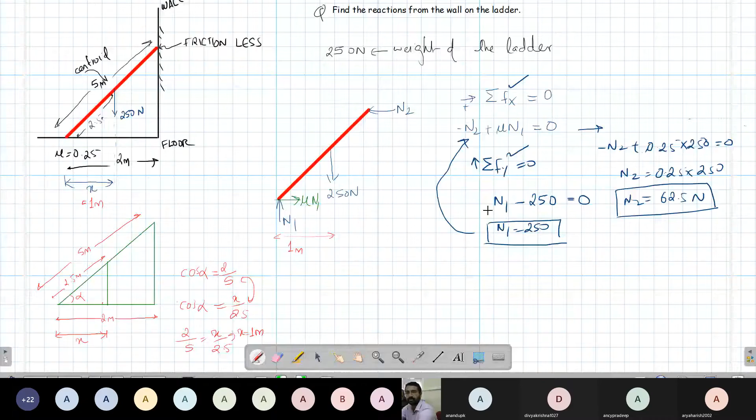So last class we were looking into ladder friction. Basically all the ladders that we use work because there is friction. Friction alone allows the ladder to work. If there is no friction, what happens? If the ladder is just kept like this, because of its weight, it will just fall down. It is friction that is keeping the ladder in place.

So we have seen some problems. I think we have given assignments also, and seen some of the assignments. Some people are yet to finish the assignment. I don't know why.

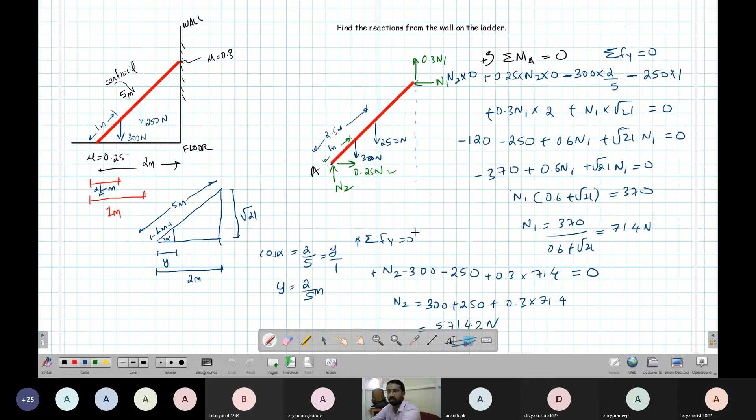Okay, right. So this is the ladder friction problems that we were doing. Today we will start a new module. So basically friction, there is a lot of problems that we have to see.

So what I'll do is, for the last 5-8 years of KTU problems, I'll make small videos of each one and upload them in Moodle. After uploading, I will put it in Teams also so that you can go into that and look. Otherwise I'll upload it on YouTube. Either you can go look on YouTube, or I'll put it in Moodle and you can look there. So regularly make sure that whatever problem I give, you know how to solve it. Or you can change the values yourself and solve it. And on weekends I will start giving more assignments from now on.

Because in class, you have to make sure how many problems you count, how many problems you are doing. The more problems you do, the higher the chance you have of getting marks.

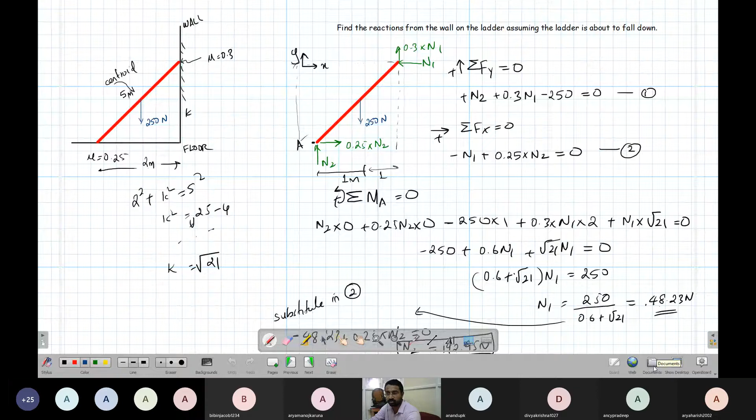As we move forward, we are going to use all these concepts. Okay, right. So now today's class, what we will study is a new concept called moment of area. I don't know whether you have studied this in your 10th or 12th.

When I was studying, it was there in 12th - moment of area and centroid. I'm sure it was there for you people also.

So what is moment of area? Moment of area is defined as - let's say we have an arbitrary area here. Arbitrary area, some area is there. And we also have two axes.

Moment of force is - so basically we have a force. Let's say we have a moment about this point. The magnitude of force is this, and the distance is, let's say, d. So moment of force is equal to force times perpendicular distance.

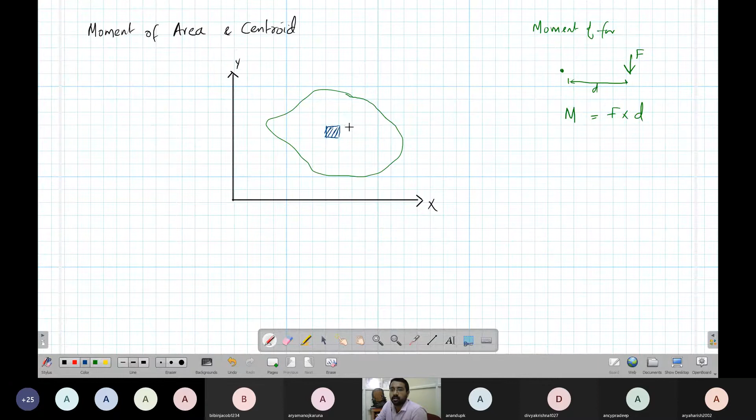Same for moment of area. So let's say I will take a small arbitrary area here. I'll take this area, each area, I'll call this area dA. If moment of area - I can again find this moment with respect to any axis also.

Force - so let's say more generally, some force is there, and some moment is there. Two axes are there. We can find moment in this plane or moment about this plane.

That means you split this force into two. This is the y component, this is the x component. You can also find moment about this line, like a point here. About this axis, we can find moment about this axis also.

Let's say about this axis, the component into perpendicular distance. This component into this distance will give moment about this axis. The force in that axis, that component into this perpendicular distance, multiply. Similarly, this also you can have moments. We can define moments in any axis.

So let's say we define moment about the y-axis. So I'll write, because of the small area, I'll call this dM about y-axis equal to the area into perpendicular distance. So this perpendicular distance, I'll just give some arbitrary distance. Let's say I'll call this distance x, small x. I'll call this distance y.

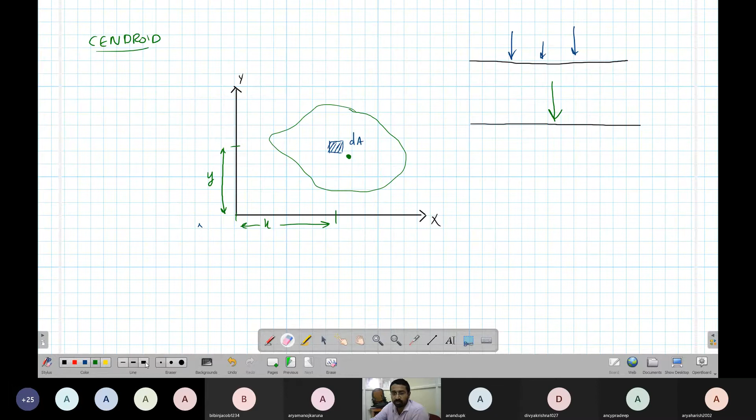So similarly, we can assume this entire body, we can represent this entire body in a single point. I don't know what is that point, let me say this is a point. The entire body area I can represent in a single point, such that the moment of area of this entire body will be same. So let's draw an equivalency, at more ease. So this I'll remove.

Okay, so moment about x of this and moment about x of this. Let's say the area of the body is A. I'll assume this entire A is concentrated at this point. Area full, I am assuming it to be concentrated at some point. So this point is, let's say, Xc and Yc. Xc is for centroid X coordinate, Yc is for centroid Y coordinate.

So moment of this area about x is integral of y dA. Moment about y equal to integral of x dA. So this is same as A times Xc, A times Yc.

So let's say this point area, same area, but it is located at one point. About x axis the moment is area into distance, distance is Yc. About y axis, area into distance, that is Xc. So this both are same, same or equal.

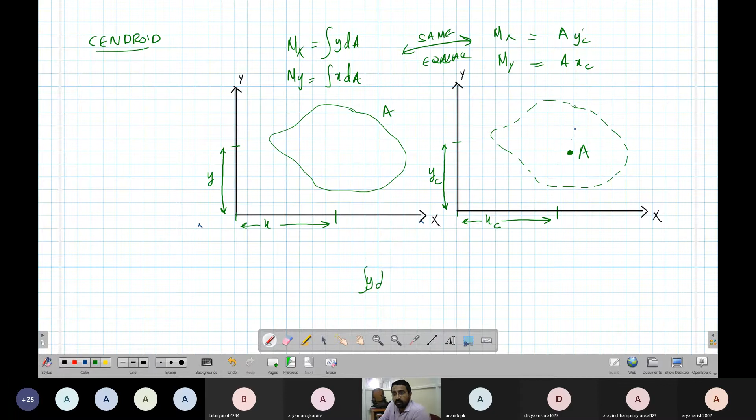If I equate these two, I'll get integral of y dA equal to A into Yc, Mx. So that means Yc equal to integral of y dA divided by A. Similarly my Xc is equal to integral of x dA upon A.

This is the formula for centroid. I told you it's random, so this equation and this equation I equate. From A Yc equal to integral y dA, that means centroid location Yc equal to integral of y dA upon A, and Xc equal to integral of x dA upon A. I hope this is a simple concept.

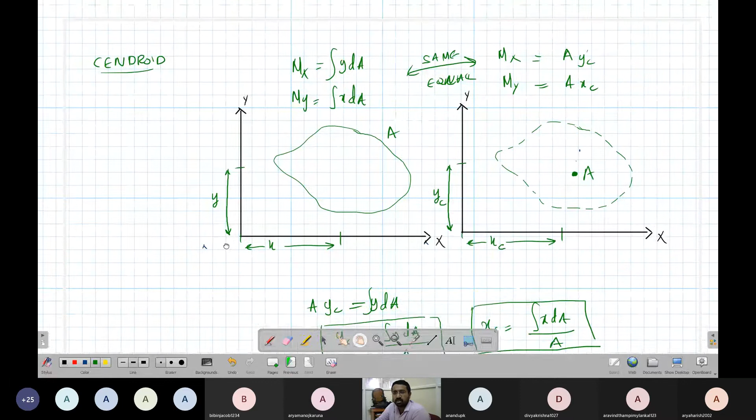So now our next aim is to find centroids of regular shapes and composite shapes. We will do one regular shape, and then we will also do a composite shape.

So let's say rectangle, we'll take a rectangle, the easiest one. This is a rectangle, let's say this is the width, this is the depth. Okay, and I will also construct an axis. I will put an axis here, if not an axis it should be easy.

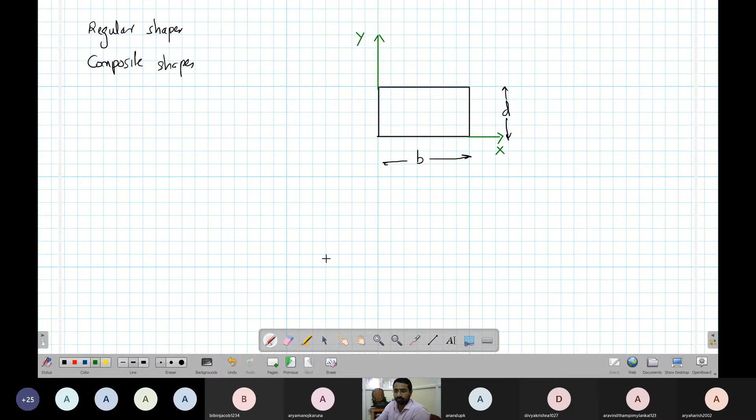Right, so this is my x-axis, this is my y-axis. Now, what is moment of area? Moment about y equal to integral of x dA.

So what I will do is take a small strip here, a very small strip. This strip has the area dA. Why didn't I choose a small square? Because this strip's area I can find very easily. It's an easy item, a symmetric shape, so I can take a strip here. Let's say I'll take this, so this is x.

This very small distance in the x direction is dx. So my dA will be equal to dx as the width, each rectangle area is width into height. Height is d. So d into dx is my small area.

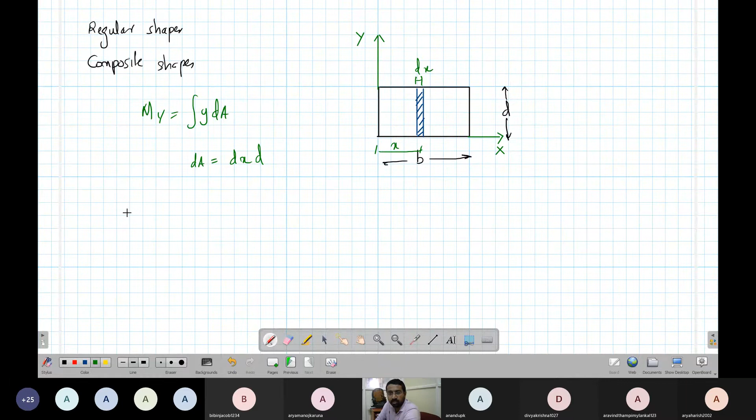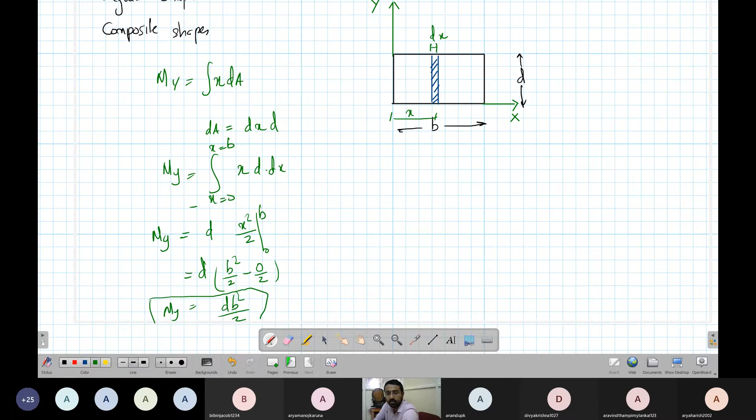Right, so this is same as, so d I can take common. Integral of x dx is x square by 2, limit is from 0 to b. So this is my moment about y-axis. This is equal to, substituting the limit, d into b square by 2 minus 0 by 2. So this is db square by 2, the moment of this rectangular area about the y-axis.

Now I told you we can assume this entire area to be concentrated at some point. So what is the area of the rectangle? Area of the rectangle is b times d. So I can assume this entire area to be at some point, and remove all these details, remove all these things.

So this entire area, in the rectangle, is BD. BD is the area, located at some distance. This distance I can write as xc, the centroid distance, and this is yc.

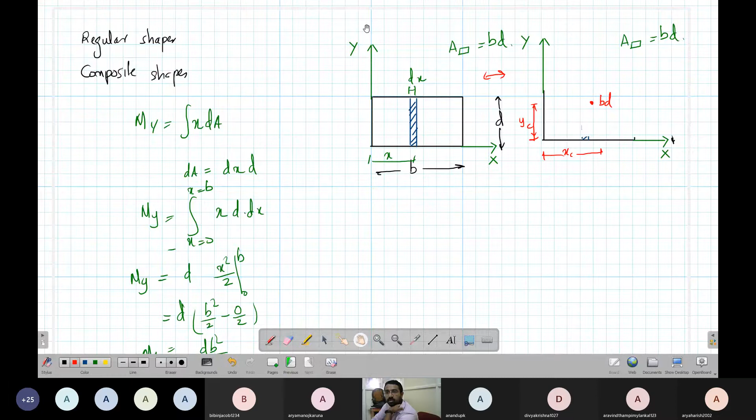Both will have the same moment of area about this axis. We have already found the moment of area of this diagram about this axis, the y-axis, and that value is db square by 2. Now, what is the area moment of this area about the same axis? We can write m about y-axis equal to area into perpendicular distance, so b into d is the area, perpendicular distance is xc.

So I can equate these two. Equating gives me xc into b into d equal to db square by 2. So xc equal to, cancelling b and d, xc is equal to b by 2. I think you people already know this: the centroid is located at b by 2 distance. So this is b by 2.

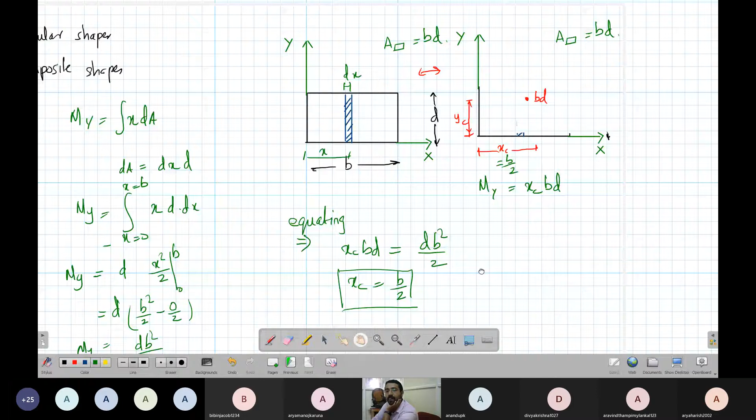So how do you find the other axis, the x-axis moment? That is also the same, the only thing is you have to take a different strip, a different horizontal strip. For example, this way.

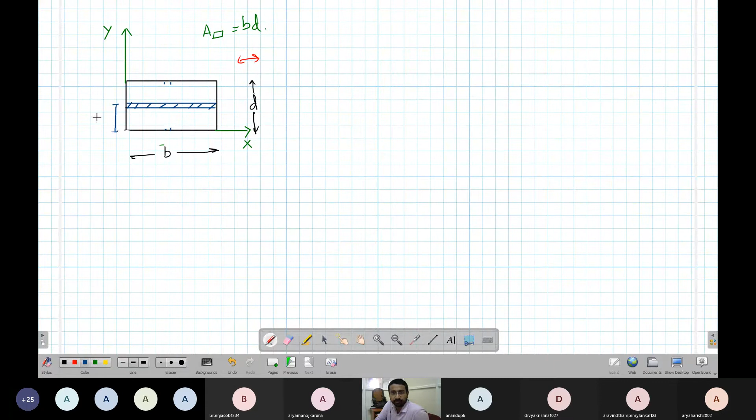Okay, so now we have to find moment about x-axis. I will take a consider strip in this direction. Let the strip be located at distance y, and the thickness of the strip be dy. So small change in y, dy. So my area will be dy times b.

So moment about x-axis will be the integral of y dA. That is, the location is y, and dA is b dy. What is the limit? Limit is y equal to 0 to y equal to d.

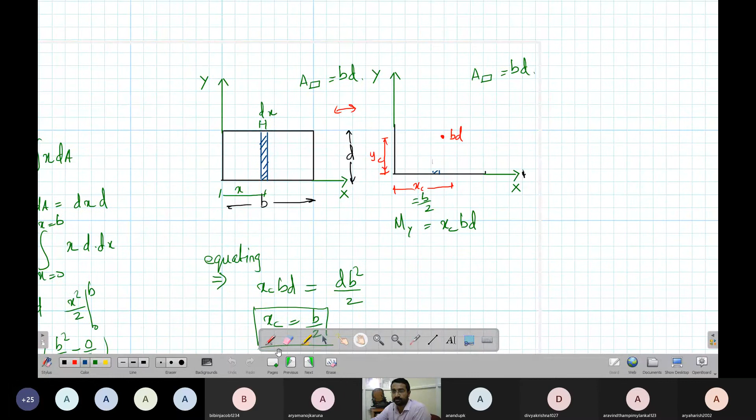So we can write this as area is b times d. The perpendicular distance is yc. You wouldn't integrate it because it is a point. Area with a point, and value of area is b into d.

So we have to equate these two, and you will get b times d times yc equal to bd square by 2. So if you cut, we will get yc equal to d by 2.

Okay, so this will be equal to d by 2. That is the rectangle centroid, b by 2 and d by 2. Width in the half, depth in the half, on a centroid point area. Okay, so this is about centroid of very simple diagrams.

Now we have to find centroid of complex diagrams. Complex diagrams, so let's say you can get many types of problems. So let's say you have a diagram like this.

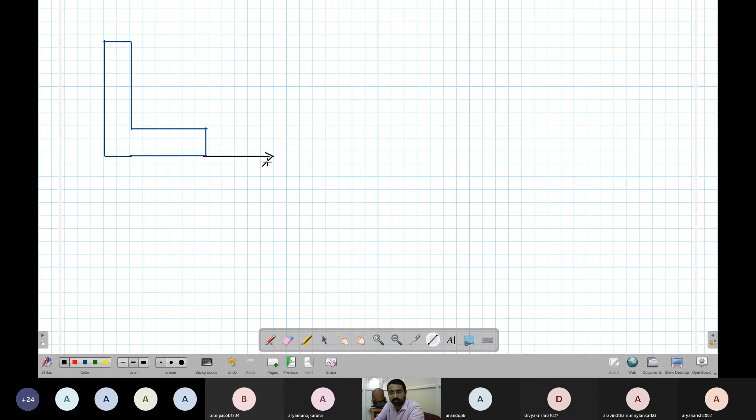Okay, so let's say I'll draw an axis. Axis, that is very important. I'll draw an axis here. So let's say this is my first axis, this is my second axis, because we are always finding centroids with respect to a reference axis. So this is x, this is y. The x-axis and the y-axis.

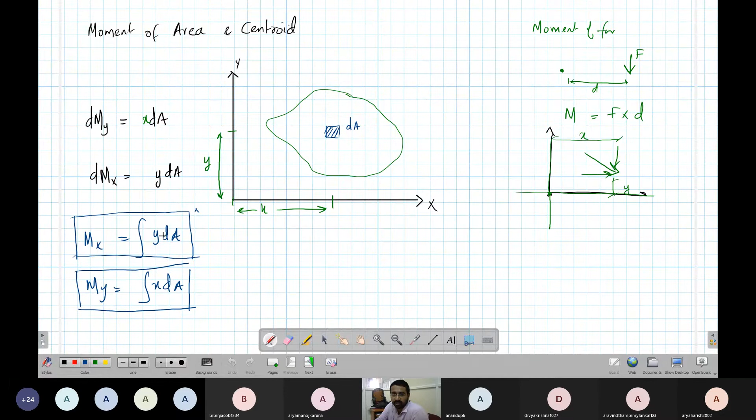Okay, this we can do in many ways. So one way is we will identify one area, so this is one area in which I can know the centroid. There is another area, that is this. These are two rectangles. So I can name this as my first area, and this is my second area.

Okay, so we have to find the centroid in both directions, x direction, y direction centroid. Regularly divide areas, convert it. So we have a rectangle here, we have a rectangle, right? So let's say we will put some sizes, numbers, then it will be easy for us to calculate. So let's say this is 100 mm, or this is 200.

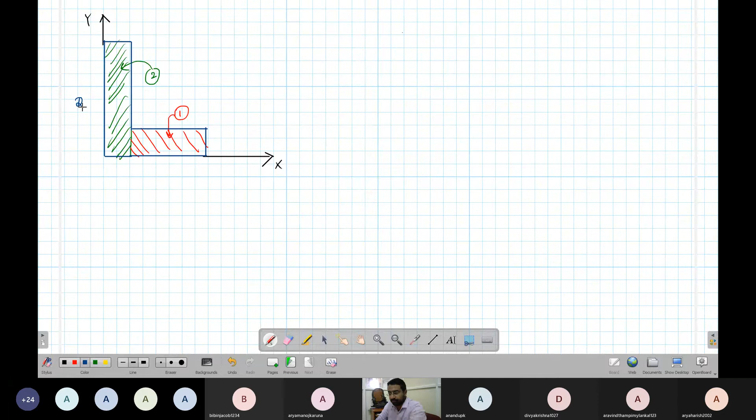This is 200, let's say this is 20. Let's say this is 100, let's say this is also 20.

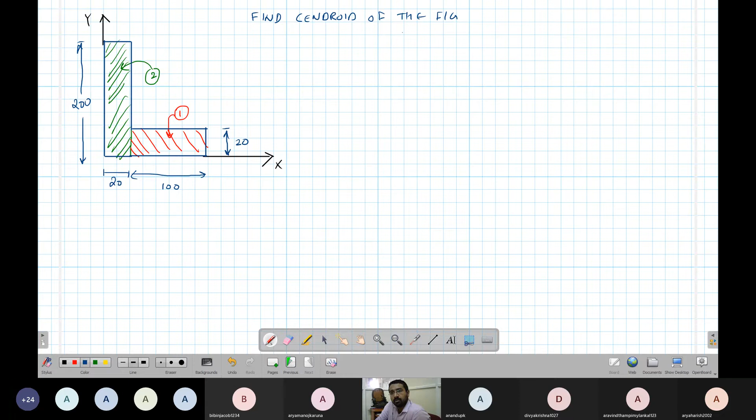So usually we need to find the centroid of this figure. I told you we have to split into small areas, so this simple table form makes it more easy. So what all we have to do in the table form - let's say we'll find A.

AI, AI is from 1 to 2, we put a guess there. AI XI, then AI XI, then YI, AI YI. Let me make the table - it will be more systematic and more easy.

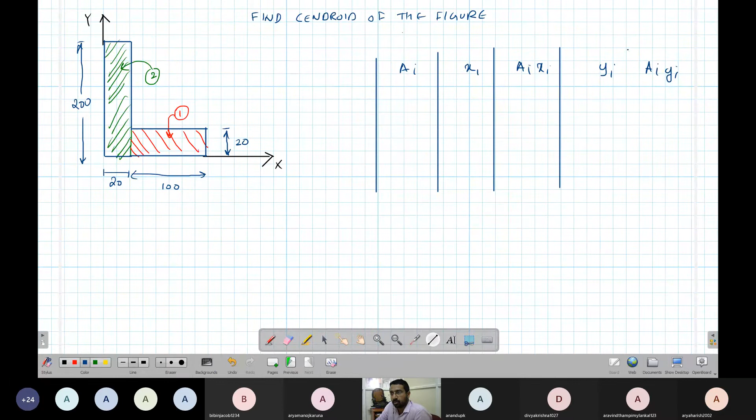So first I will find the centroid of this figure, with respect to the same axis. We carry on the axis. So I'll just calculate for this figure - here figure assumed to calculate.

So what are the values that I know? This is 20 and this is 200. What is the area of this figure? So this is my first figure - I should have taken this as I equal to 2.

Or I will do one thing - I will change the numbering. So let's say this is my second figure, and let's say this is my first figure. So I equal to 1, first figure.

The first figure, we know what is the centroid of this figure. So this is my Y1 at the height by 2 - area this is 200. Then this is my X1, X1 at 10.

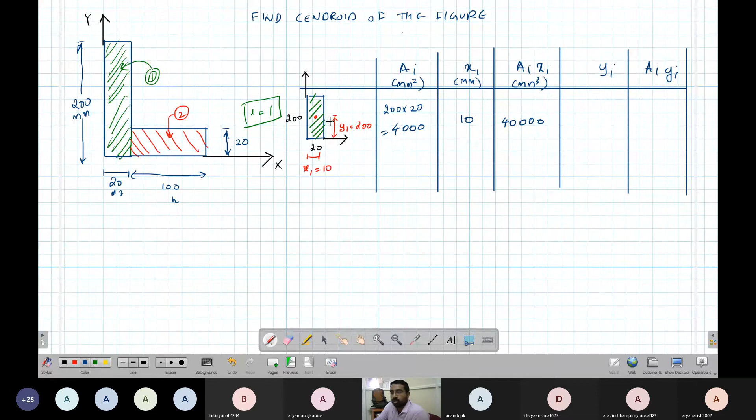YI, since total height is 200, half of it will be the centroid, that's why it is 100. This is 20 to half and 10, so this will be 100.

AI into YI - what is AI? 4,000 into 100, so it is 400,000. So this is my first area. What about the second area? Second area also I can find now.

So second area, it is a smaller rectangle like this. So this is my second area. What is the axis? I have an axis like this here - where the axis under, same axis I have to use.

And here axis, same again. We have this distance here - this is x. Now what is this distance? This is 20 mm. What is this? 100 mm. What is this? This is 20 mm.

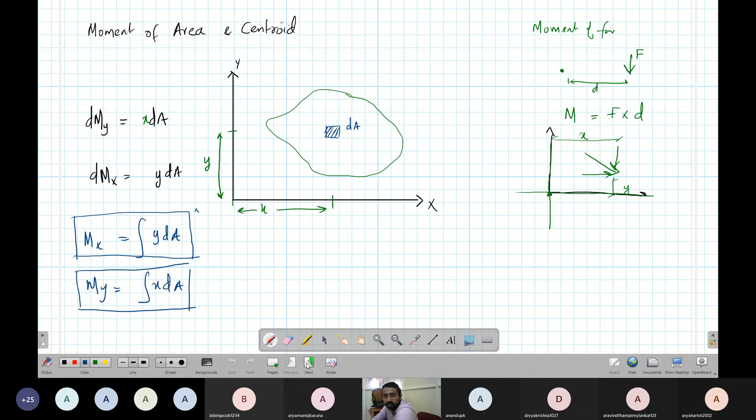20,000, right? Now how do you find it? We integrate over area into centroid, and we get the moment of area. So total moment of area is basically if you add these two, you get moment of area about the axis.

So AI into XI, what is that? Area into XI is basically moment of area about Y. So this is MY, and this is MXI. We add this to get the area moment about Y, equal to this plus this.

That means 40,000 plus 1,40,000, that is 1,80,000.

Okay, now what about this? Moment about X equal to, we have to add these two. So this is 4 lakh plus 20,000.

Okay, so we have found the moment. The full area we can assume it to be. So what is the total area? Total area equal to this plus this, 4,000 plus 2,000, that is 6,000.

So this entire area, like 6,000, can be assumed to be located at a distance. This is the area, some point here, I don't know what is the point. So it is located at some distance, that is the centroid along x, some distance along y, that is the centroid in y.

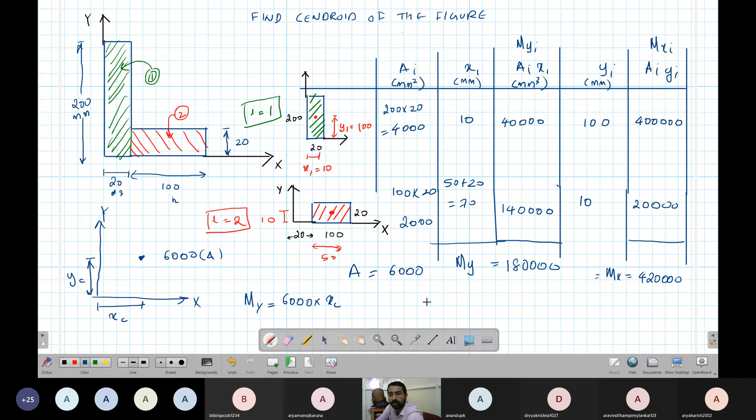Okay, moment about Y axis will be equal to 6,000 into xc. And moment about X will be equal to 6,000 into yc, that is the area.

So that means xc can be equal to MY upon 6,000. MY we already calculated, so that is 1,80,000 divided by 6,000.

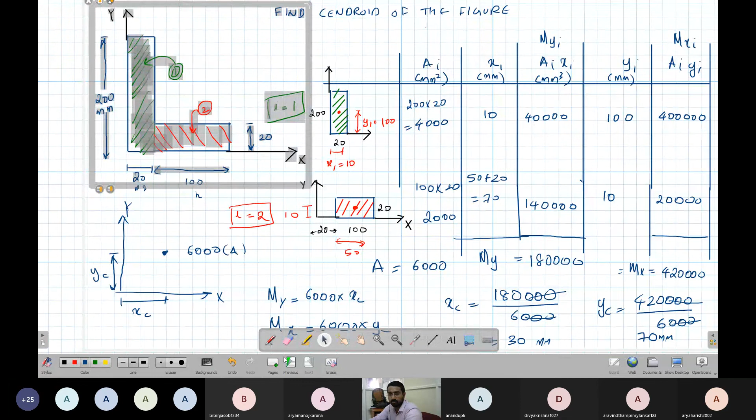So let's say this is the centroid. I don't know exactly where. X direction I have to travel 30 mm. So this is 20, this is 100. 100, so 30 means 10, somewhere in this direction I have to travel, somewhere here.

Okay, and y direction I have to travel 70 mm. So this is 20, so somewhere here. So this is my centroid, xc comma yc. Xc is equal to 30 mm, yc is equal to 70.

So this is how we find the centroid of a composite figure. While you have to remember this, the concept is simple: area moment about this axis, the entire area is at that location, our area moment about this axis is equal. I hope this is clear. Step by step I've done it, so I think it is not a problem.

There is another way of doing this, so that is what I want to discuss now. We will not... I don't think we will have enough time to do that, but still it also will help you.

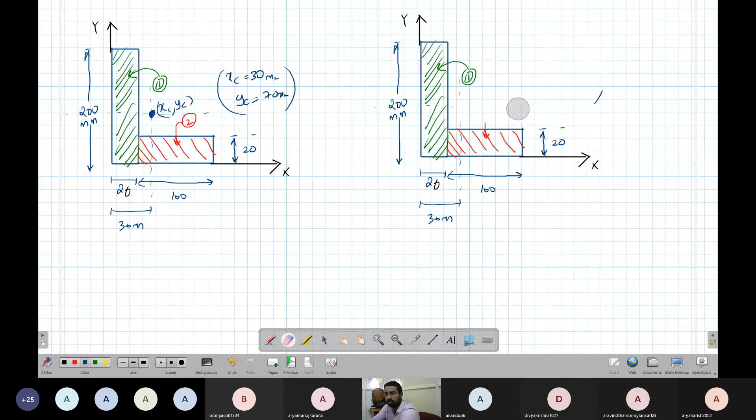Okay, there is another way of doing it. We'll assume this full rectangle. Here, the full rectangle item is the first area, the full rectangle.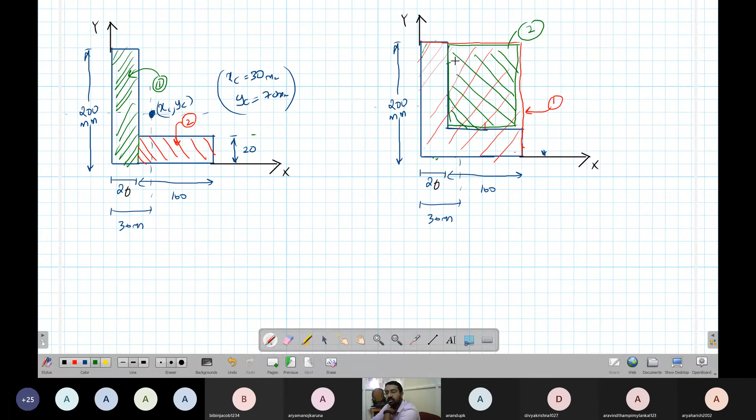So that is my first area. Okay, then I will consider a negative area here. This was the second area. But taking the full rectangle area, I find the centroid, I find the moment about this axis. This is a negative area. Okay, so I can do this also.

So I think I'll quickly try to solve this. So let me see another way of doing it.

Okay, so this is my first area. First area is the full rectangle. So we take the full rectangle.

So what is the size? 20 plus 100 is 120. This is my X, this is my Y. Total, how much is this? 100 plus 20 is 120. And this is 200.

Okay, we figure the centroid now. We know what is the centroid. 60 and 100.

Okay, so what is the area? This total area is basically 200 times 120. Okay, so this is basically 24, then 0, 0, 0.

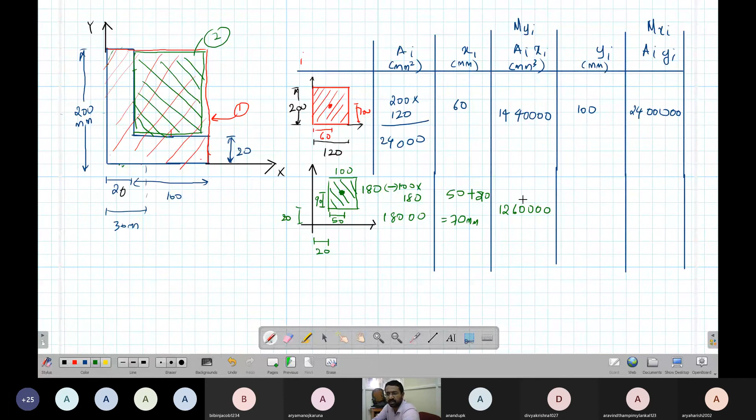Right, so this is area into x. Area is minus, we have to write this minus here. Sorry. Okay, so this will be minus 126.

Right, now what about yi? Yi in the location is 90 plus 20, equal to 110. Okay, Ai into yi is

18,000 into 110, or it is 1,980,000, with a negative sign.

Okay, so you find the total sum here. We add up the two areas and find the sum. Summation of area you find, summation of moment yi you find, summation of xi, mxi.

Okay, once this is found, what is it quickly here first. So 1,440,000 minus 1,260,000, this is equal to 180,000. Okay, we are getting 18,000.

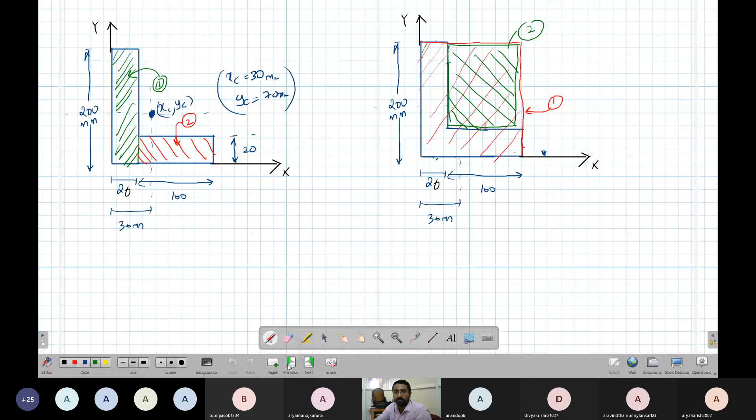Okay, so for some questions it is easier to do this way. So that depends upon you. Some questions, looking at the questions, it will be very easy to subtract, easier.

Okay, so don't mess up this minus sign and all, negative and minus. Area negative automatically, so minus area into x, minus area into y, the value will be minus. Okay, so ultimately these two areas will be same. These two match, this moment, area same. Only thing is you have to make sure that you are doing it correctly. Okay, so these are two different ways.

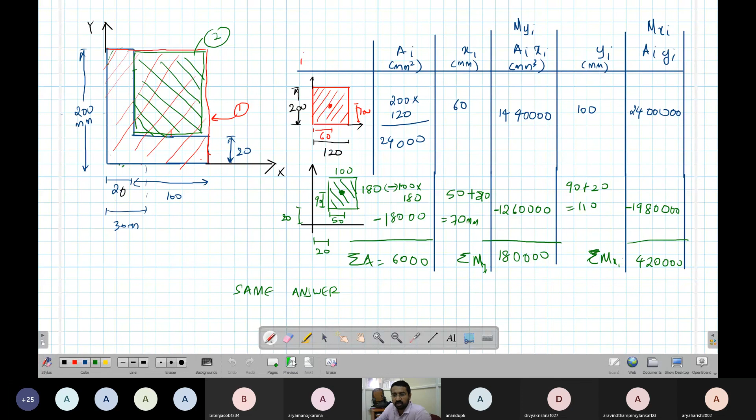Okay, so I hope this is clear.